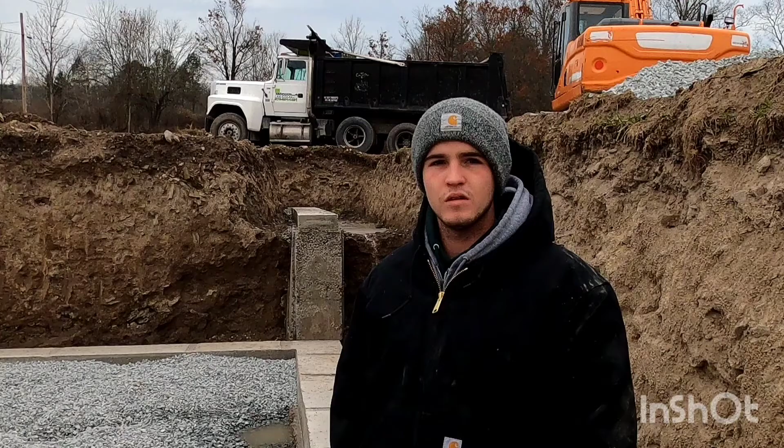Today we're putting the wall lines up for our block foundation. So this is what we're laying out today. This is the house, the basement, and the garage. And what we're doing is getting all of the outside corners established.

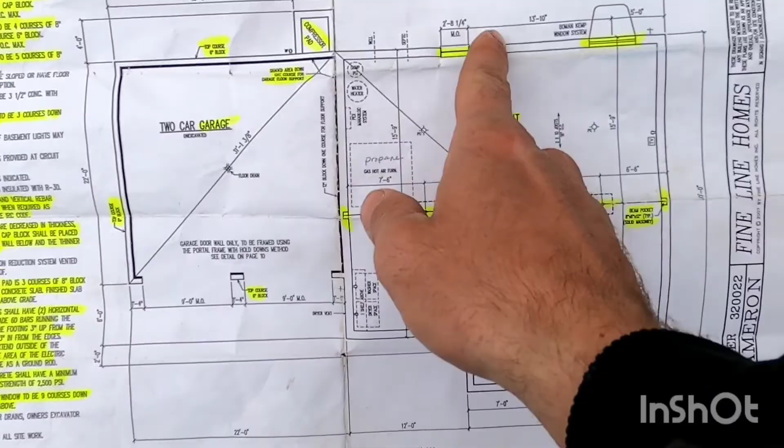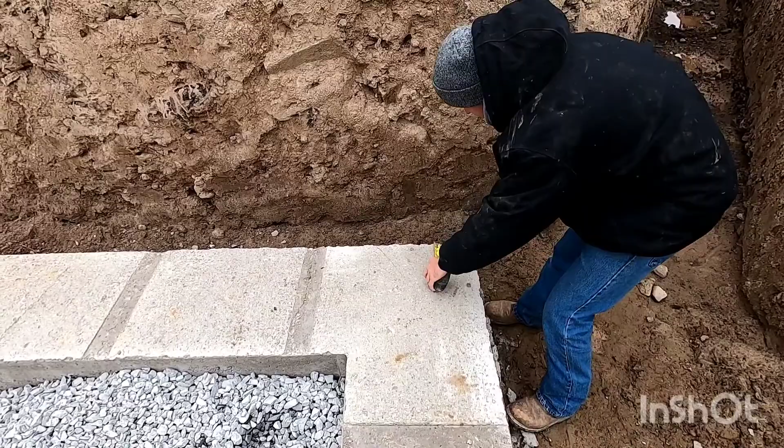So this is one continuous wall, and we have a jump up there. That's what we're starting at here. So this is that long wall, the jump up. Since we formed up these footers and put the wall line up originally, I remember it was about 4.5 inches each way off this corner. Good, and I just put a hard nail in right on the corner.

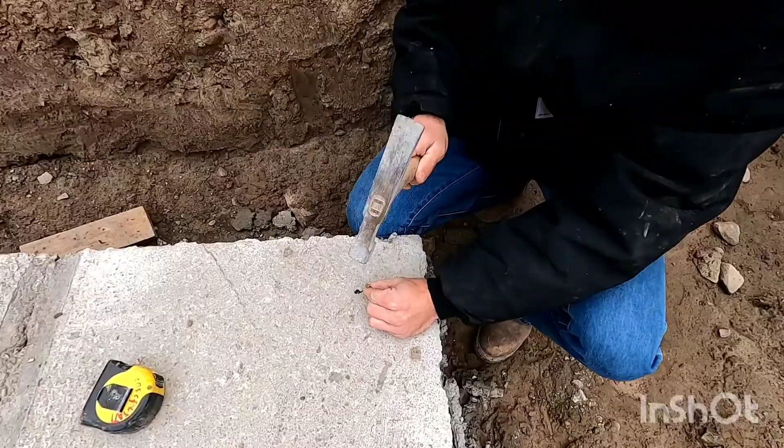So this is an outside corner. Okay, so we got this point established, and we want this back wall to be completely straight with the jump up. So we got to go from this point to that point.

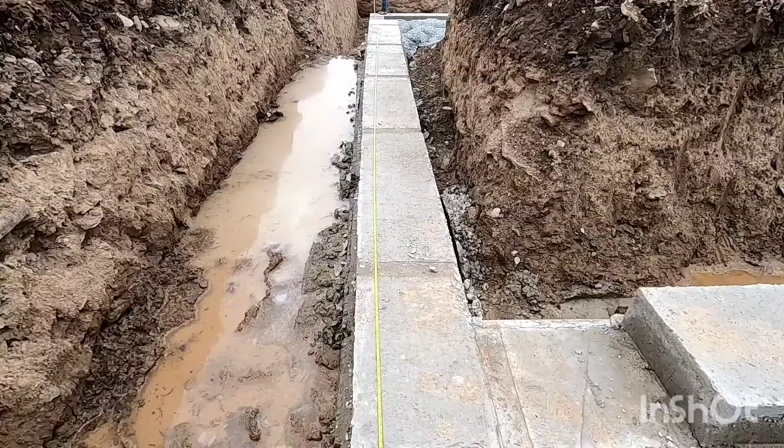It's 54 feet. Alright, so I'm up in the garage here, and again I laid out the wall line, so I know I'm roughly going to be about 4.5 inches in. So I made a little line about roughly where it's going to be on the inside, and then Saul's down there holding me.

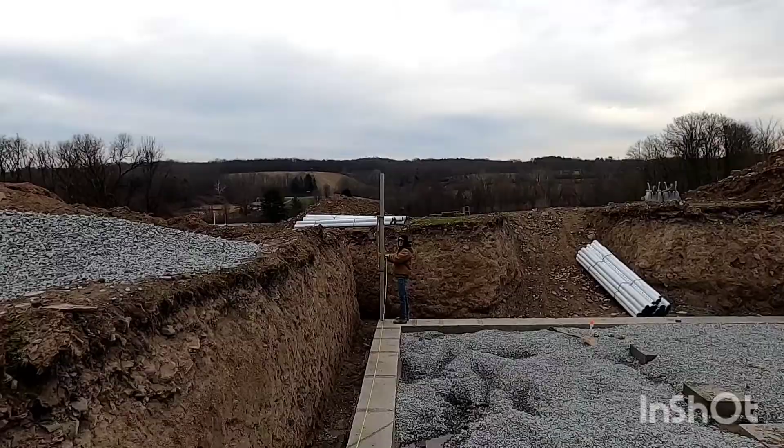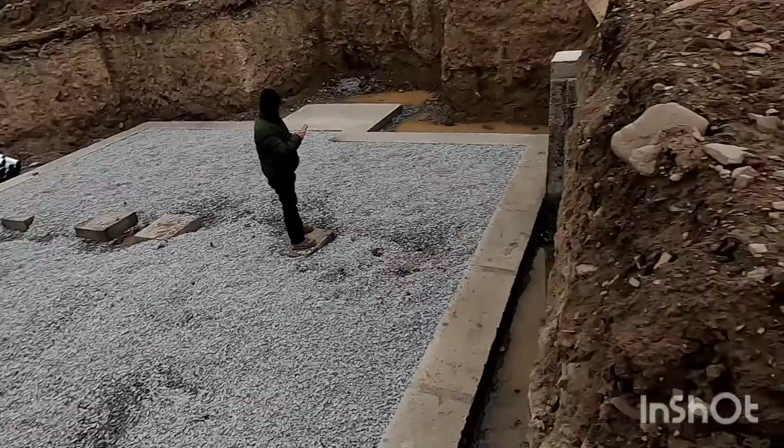So we took a 10-foot screed and duct taped a 4-foot level to it, and you hold that plumb on my corner right on the edge, and that'll give me my measurement up here. So Saul's down there holding me up high, flush with my footer. I'm over here, and I just mark 54 foot.

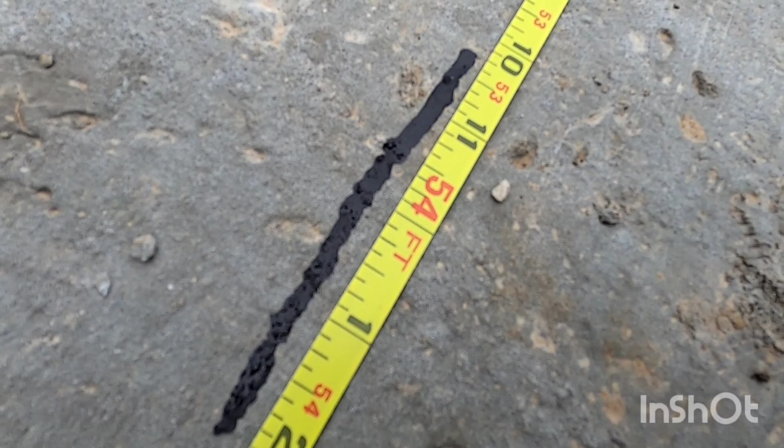So now I got my 54 mark established here, and we got to get a wall line across the entire thing and jump down. So the string tails right to the edge of the footer, and Sawyer puts a little mark for us on it. Perfect, right where the string's at.

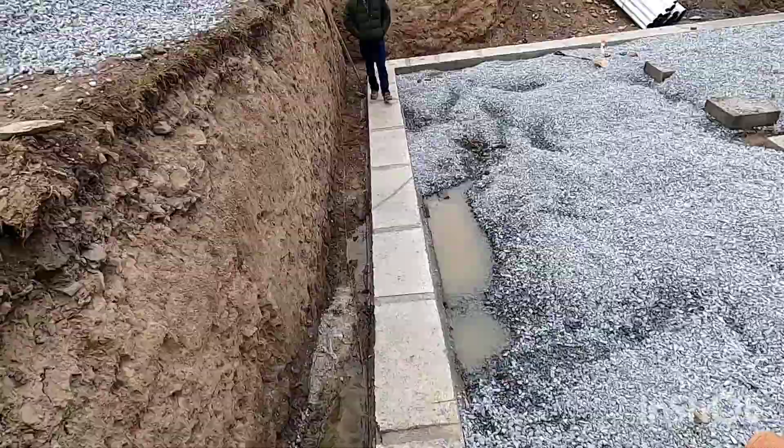Alright, so Sawyer's got our nice mark at the end of the footer here and plumb down. Now we can snap lines. Alright, now we have that entire back wall line established in these corners.

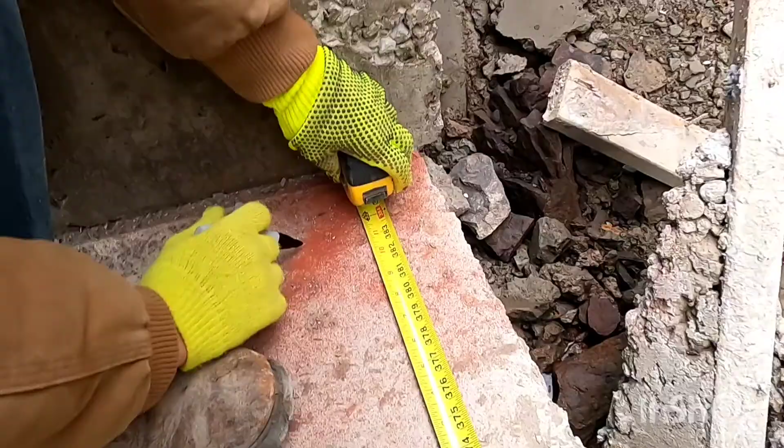Now since we have this line established, we can get this outside corner too. And all you do is look here, it says 32 foot, and we can put it right on our existing line. And Sawyer puts his mark right at 32 on that line. So we got the outside wall line, right?

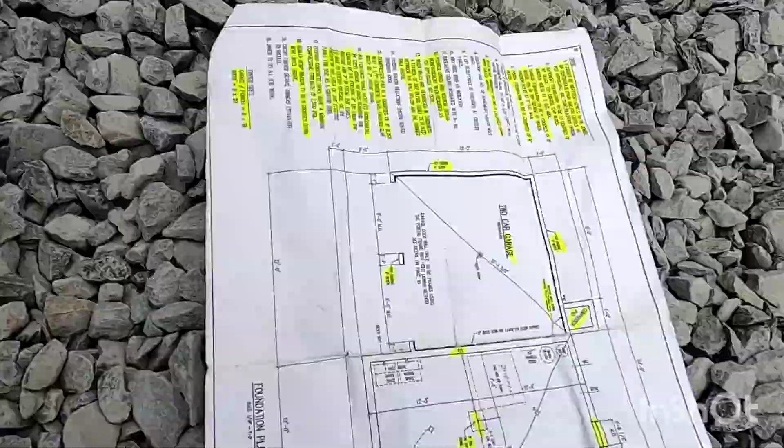And we can measure off of that now. So what we did was we measured this distance here, which is 22 plus 6, so 28 foot. And we made a line across the whole footer. So we have our wall line across the whole back, and we measured 28 foot to here, and the other end of the footer snapped the line.

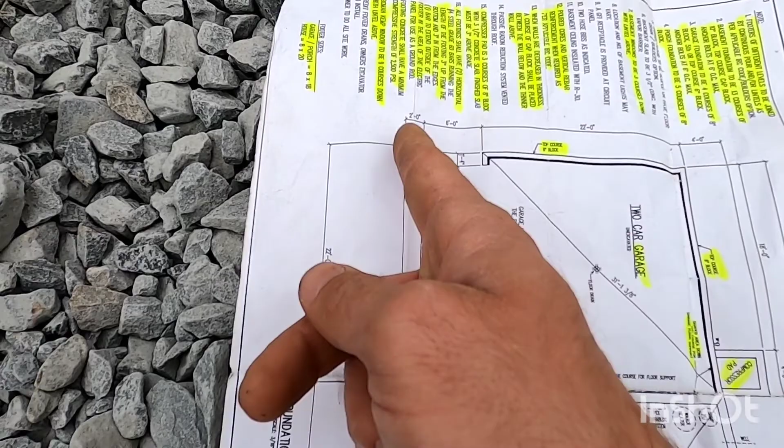So we got this line, and then we have to also get this line. So we measure back another 2 feet, so that makes it 30 foot, and we made a line across the back. And here's our 30-foot line.

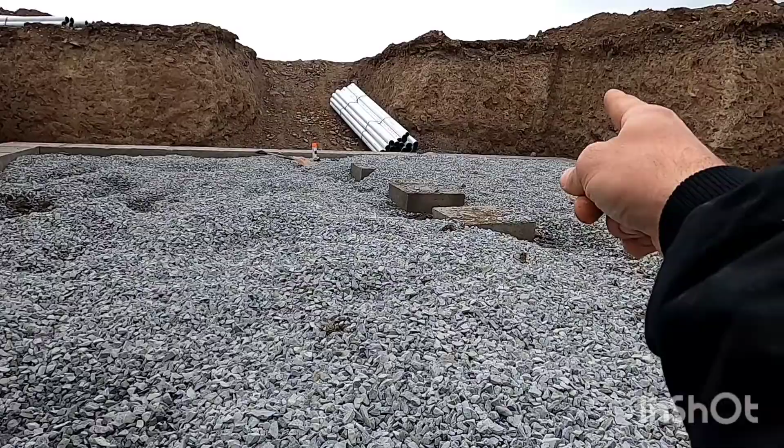So it tells us the cross measurement here is 43 foot 10 3/8. So we go from our existing point there, and we measure that to our line over there. So you just go to this line and then match it up right on the 3/8 mark. Right there, right there. And that gives us that corner.

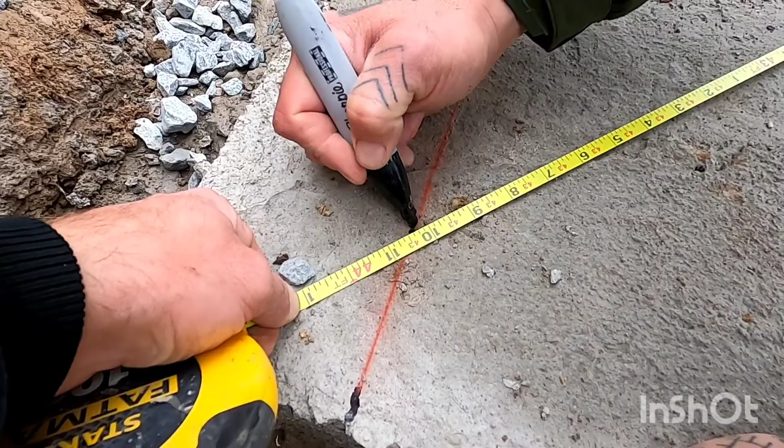Alright, so there's our pin I just marked, and we got our back wall line now. So now that we got this back wall established over there, we can measure off of it. Measure 20 foot, and that'll give us this corner and this corner.

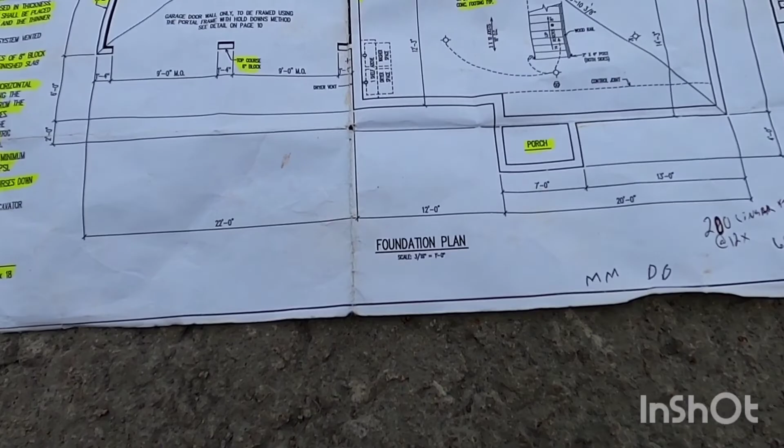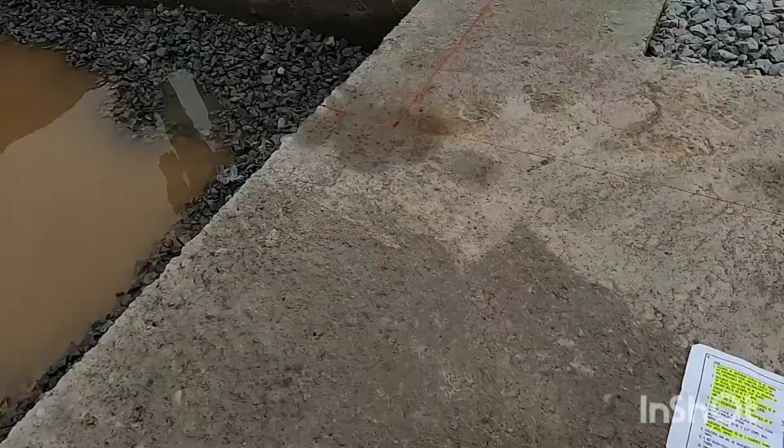So now I can go from this wall line that we made right here and go back 12 foot, find that corner over there. So that's our mark on this last corner, and we are going to double check it with cross measuring from the other side.

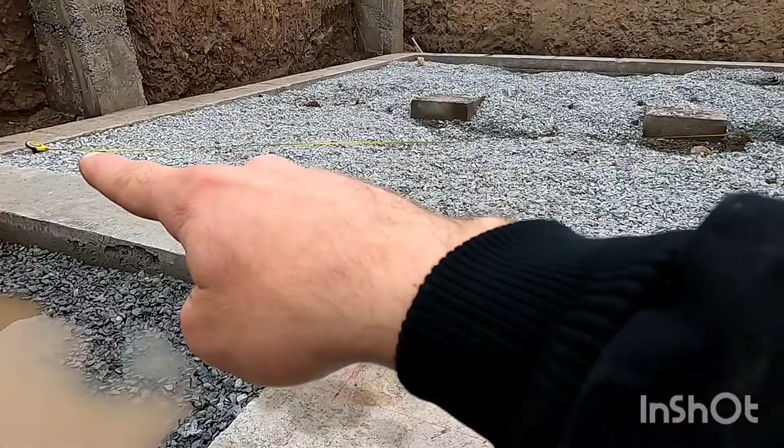If you notice, they only give us the one side. They don't give us this way, and we need to go from that one to that one. So you got to do the Pythagorean theorem and figure out what it is. So we got 32 and 28, and we got to figure out that.

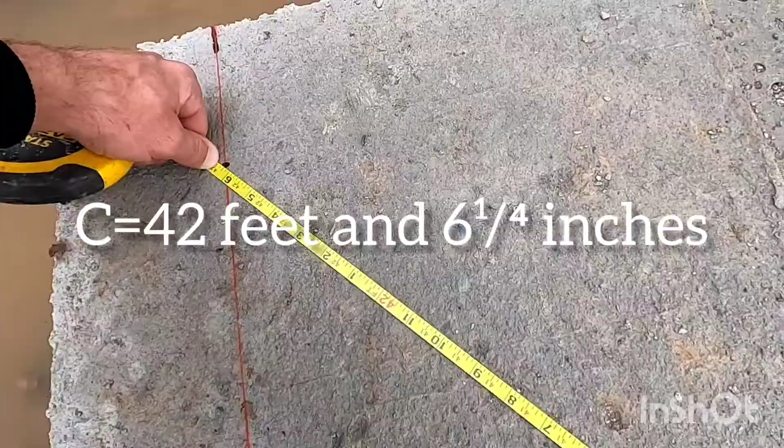So 32 squared plus 28 squared equals c squared. 42.6 what? 42.6 1/4. We got every outside corner established in the basement, and if you notice, I put little spray paint marks around all our outside corner nails so they don't get kicked.

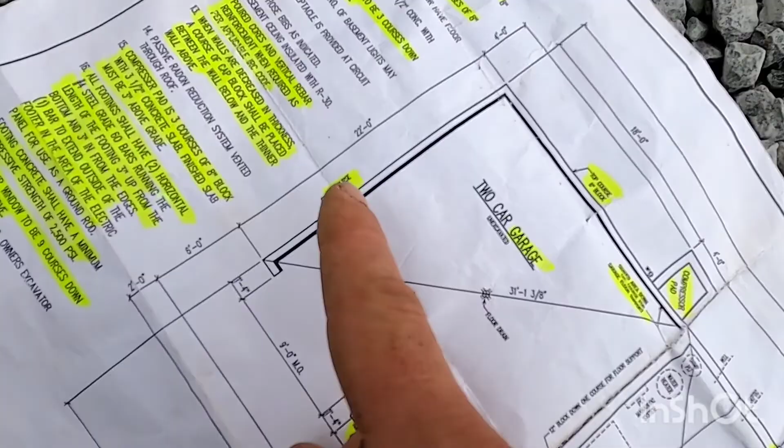This guy is all right, so we need to get this outside garage line, which is 22 feet. So we just measured off that bulkhead over to here, 22 foot, and put another wall line that we can transfer up there.

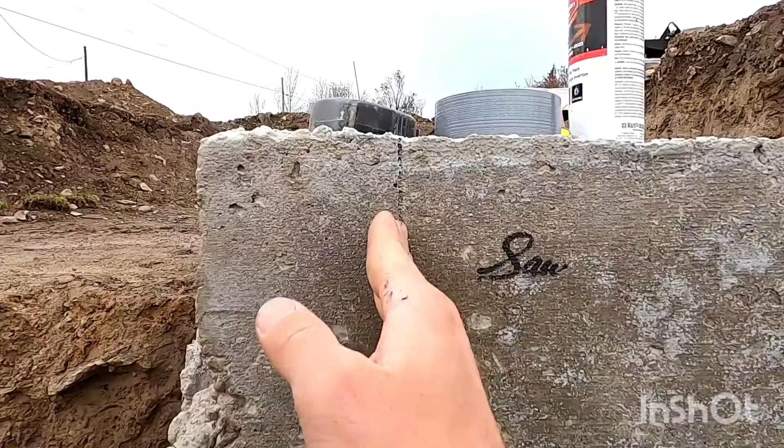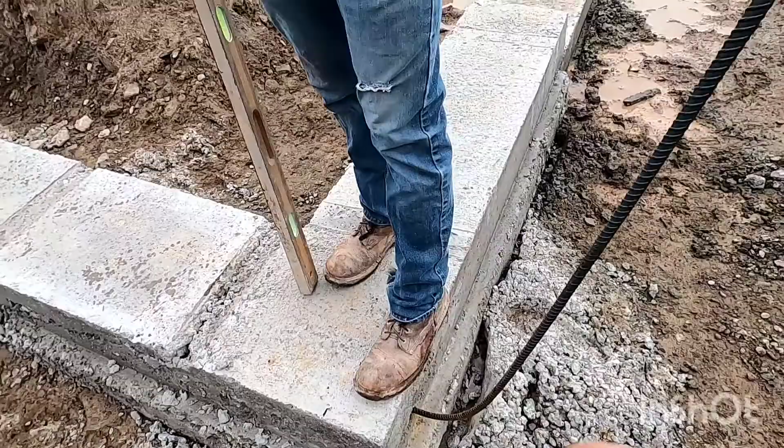We measure off our existing wall line because that's that back wall there. We measured off of it 22. I got a mark, and we put that 22 mark along this whole side. All right, so this is this line here.

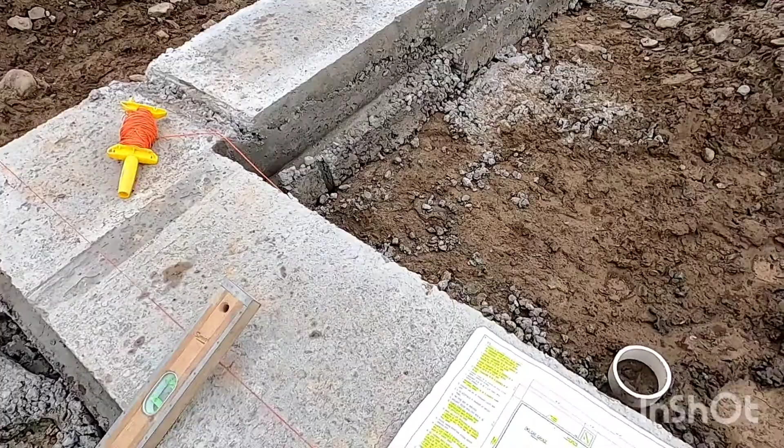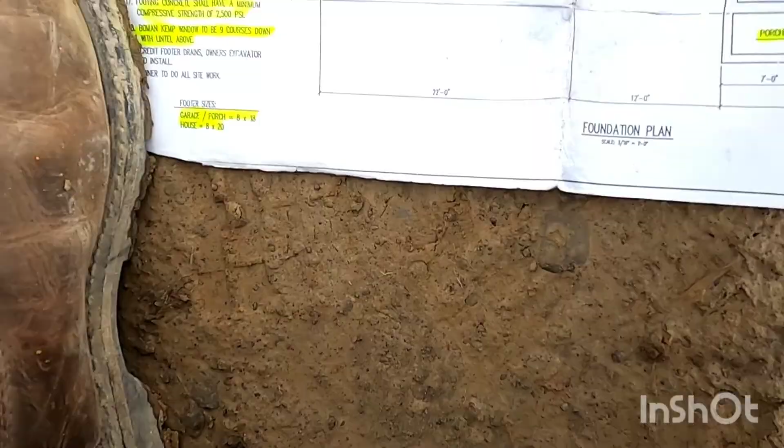All we got to do is figure out this way, and this is our last corner. So we got this outside basement line established, and we can measure off of that 22 foot. All right, so that is our last corner. We got every single outside corner of this foundation established.

So if you're going to take anything away from this video, just know when you're laying out the wall lines, just copy the outside wall line down onto your footers. It's pretty easy.